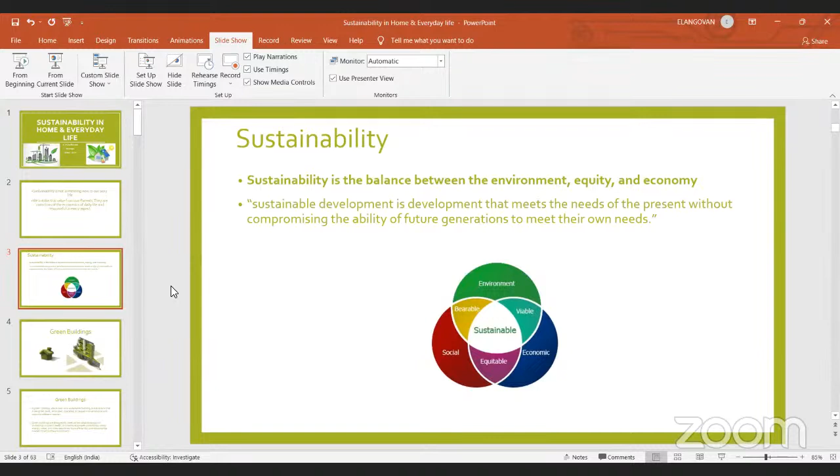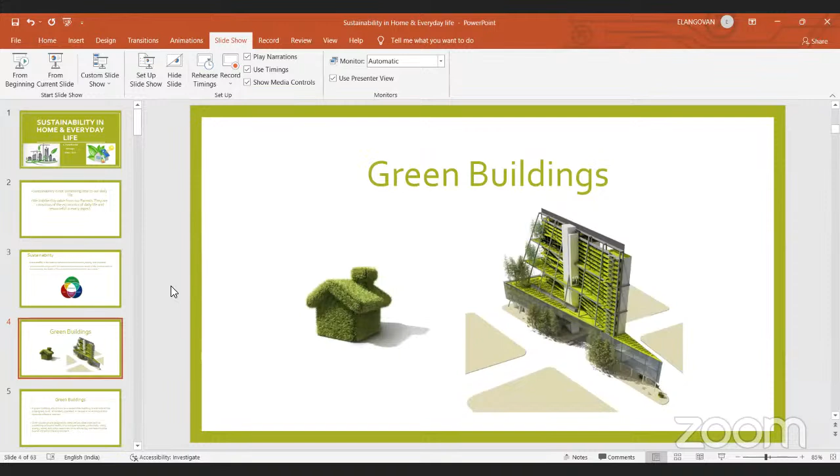Let us talk about sustainability in the sense of construction - it is nothing but green buildings. The green building is a structure that is nothing different from ordinary buildings, but in certain things, if we take care...

Madam, sorry to disturb you, there is a whistling sound. If you have two devices connected at the same place, this type of sound will come. Please check that you are connected with only one device, madam. So now it is clear, sir. Okay.

So this green building is nothing very much different from ordinary buildings, but in the way of design and building, when we design a concrete structure, we follow the IS 456 code. When we design a steel structure, we follow the IS 800 code. Similarly for green buildings, there are various guidelines given by different organizations in different countries - how we design, how we build up, how we renovate, how we keep in operation, how we recycle the buildings after its life cycle. All that put together makes a green building. You need not think green building is something we have to build only new - existing, already constructed buildings can also be made into green buildings by taking certain efforts. So the green building is a wholesome concept.

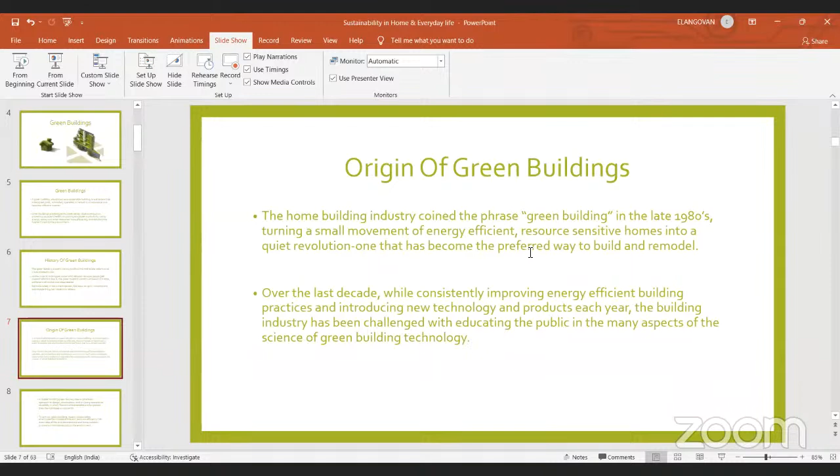All those are given so much importance. So green building is again gaining momentum throughout the world, especially in India. Throughout the world, the most carbon emitter is the US, so the same country will provide some information on how to control that also. They had come up with this green building concept, and later we also started following. India is in 7th position in the overall achievement of the green building concept.

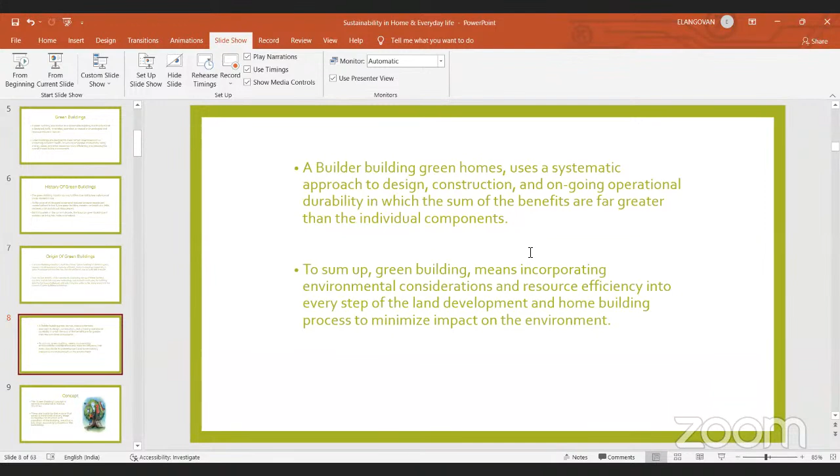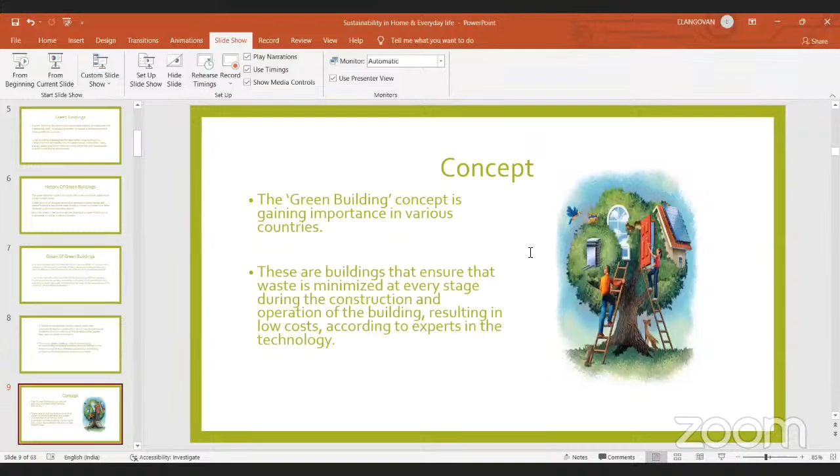The builder, basically the green building, as I said, it was incorporating environmental considerations. So the concept, how to do it, what is that green building is different from that of the regular building. The green building is like, first from the site selection onwards, every process involves considering environmental sustainability. Why do we want to go for a green building? Why not a normal building?

First is that energy, water, and the resources which are used in the building are to be efficiently used, reduced, reused - the same 3R concept we are going to tell. Another thing is protecting the occupants' health. You can construct a building, but then the building material - like asbestos, it was recently banned - the same way, because you cannot construct something which will be hazardous to the occupant who is going to live there for a long time. So you should be careful when selecting the materials for the green building.

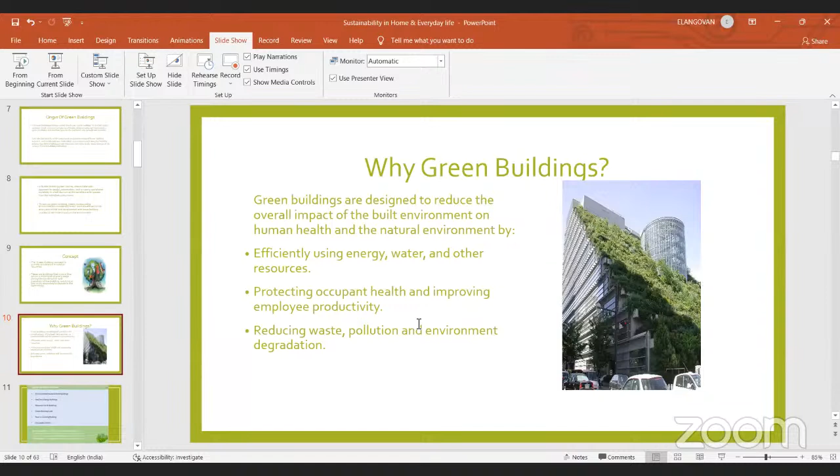And reducing the waste, pollution, and environmental impact because of the building construction and building's outcome. So water treatment and other things which are the daily part and regular part of the green building is also a concept. So what is the goal?

The ultimate goal is net zero energy building. It's like energy positive building. There is a concept of energy positive building and net zero energy building. Both mean the energy we are going to consume for construction and maintenance of the building - you should source that for yourself. If you use solar power panels for generating energy for usage in that building, it's like you are a net zero energy building. If you're going to be net positive, you can save some more on what you're using. All that will be the goals of the green building.

You'll be thinking this will cost me more when I'm putting in extra panels and all those things, but then when you think of how many years it is going to repay you, all that will be considered in the green building concept. Now green buildings have more saleability, and the government is preferring, giving more attention, loans and promoting green buildings. So you'll have those things also as an outcome - reduced energy cost, improved air quality, improved usage of materials and resources in building production, water efficiency, recycling waste and reusing them.

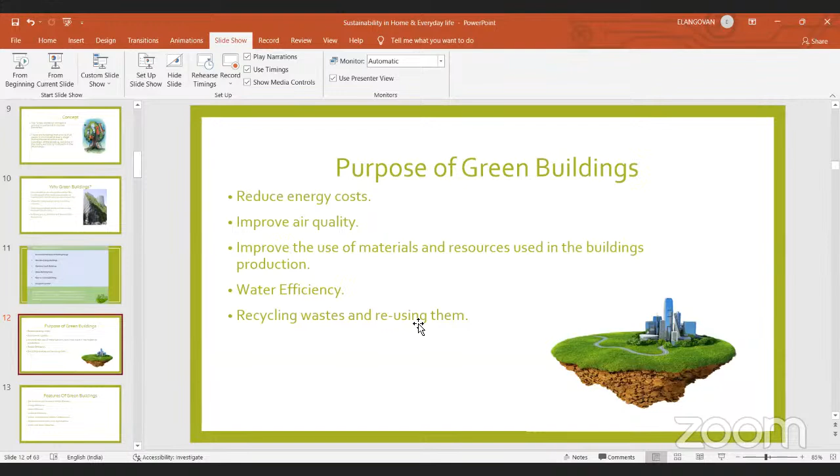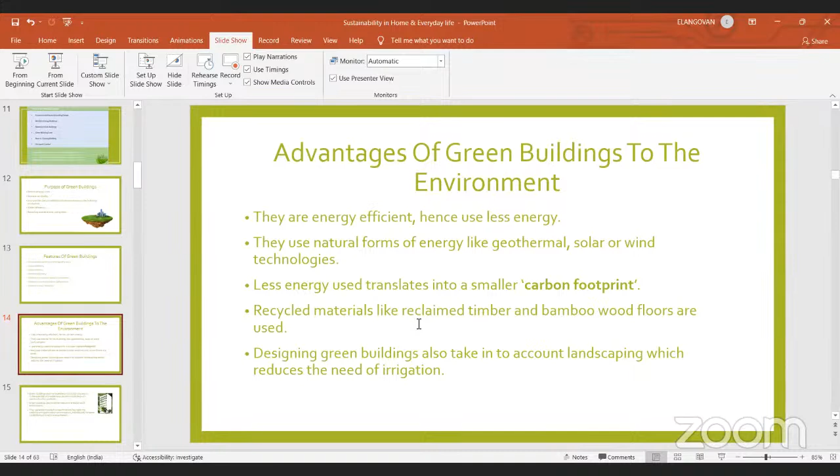The advantages are similar, the same way - the features will be turned into advantages where you have the lower carbon footprint, that is the ultimate aim. And when we are using recycled materials like reclaimed timbers and wooden floors, local materials, and natural forms of energy - that is renewable sources of energy like solar, wind and things - all those things form part of a green building.

Actually, in the green building system, as I told you, different countries have different rating systems and different organizations who rate them.

So the first and very popular concept is the LEED rating by the United States of America. Even Indian buildings are rated through the LEED system. LEED's rating system has a set of criteria, about 20-30 criteria, each with some weightage, and the total mark for the building is given out of 100. Based on that, your rating will be gold, platinum, silver, like that.

In India, based on the LEED system and other systems, we are following a system called GRIHA. I will explain a little bit on all these things. LEED stands for Leadership in Energy and Environmental Design.

Here, there is a prerequisite - as I told, there are many prerequisites. Basically, to form a green building, there will be criteria and certain things you should follow to be taken for the evaluation itself. The first prerequisite is construction activity pollution prevention, as per LEED. And water efficiency - water usage reduction during construction as well as during the operation of the building, whether it is a home or a commercial building, all those things will be taken into consideration.

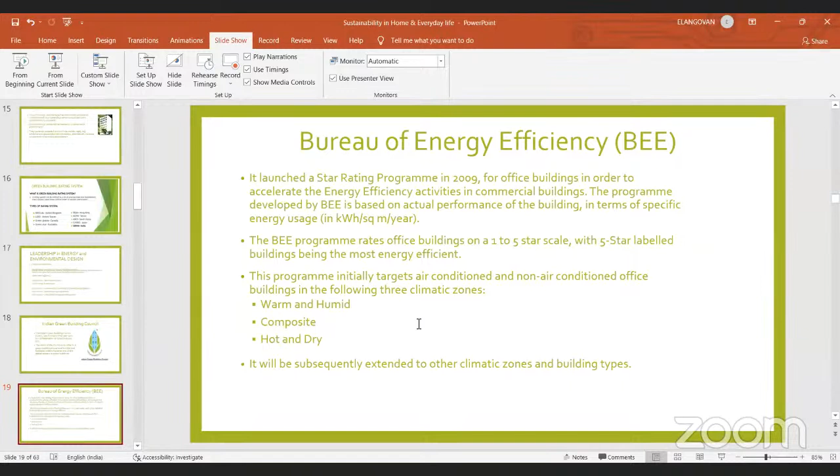The most prominent system is the GRIHA system. This was established in 2007. Here they give 34 criteria on which the building will be evaluated for sustainability. The main implementation here is renewable energy.

All the measures which we do, we knowingly or unknowingly will be doing all these things. Rainwater harvesting in Tamil Nadu - almost every house will have that. We, knowingly or unknowingly or forcibly, do that, and that is also a part of a green building system. The government provides certain schemes which people may not be aware of by name, but we will be doing that in our daily life.

Here we have the criteria again - the 34 criteria will be weighted for 100 marks. The first will be site planning - how you select the site. That will be given 1 point. Like this, you will have a number of points which will be evaluated. Out of which, if you get 50 and above, then only will your building be considered as a green building.

I can just go through some of the points in that criterion system. That is site selection - you have the site feature, and that is why site selection is important. You should not select a site where it is thickly populated and then construct there. You should have a provision for natural ventilation, and that will add points in the further criteria. So your site selection is important in that case.

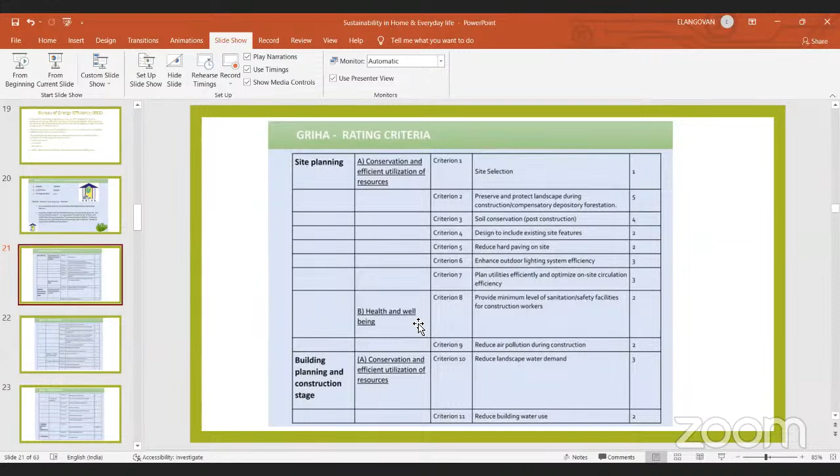Apart from site related things, there's also building planning and construction stages. For construction, we require water, so how that water is recycled and reused matters. Also, the landscape in commercial buildings needs watering, and that is an operational cost. As I told you, it's not only the construction, it's throughout the lifetime of the operation of the building. You have to take care of that efficiency - that is the green building's ultimate goal.

Next is optimizing energy performance. Then we use recycled materials like fly ash as industrial waste. Now in cities, bricks are barely used for construction - only fly ash bricks are used, because we don't get normal sand like we would in the village side, only M sand is available. So knowingly or unknowingly you are contributing to the green environment, because government restrictions automatically push you to build greener.

And renewable energy utilization - government has given many positive schemes for installing solar panels in your house, giving you energy savings through renewable resources. Even for commercial buildings and small scale industries, when they install solar power, they are given more preference and positive incentives compared to normal consumers.

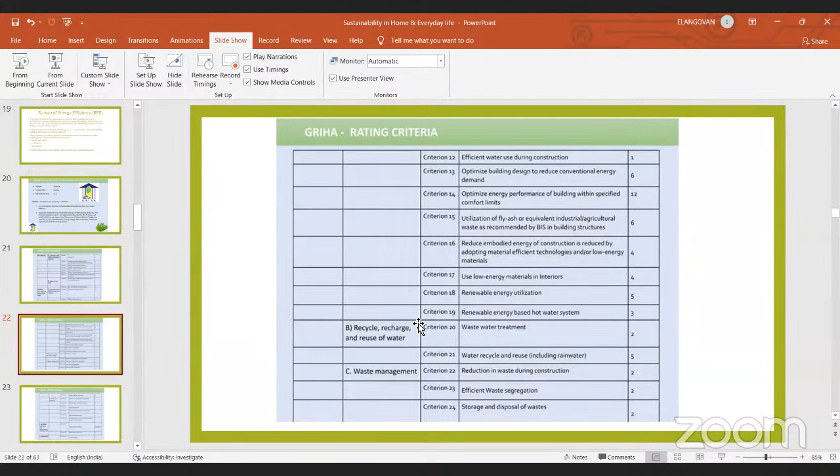Next is paint - generally we used high VOC paints before, but now they are reducing that content to be eco-friendly. We are maintaining paints that don't emit CO2 or greenhouse gases - those are now banned, and we ensure we use eco-friendly materials for construction as well as architectural features.

And in green buildings, there are no smoking zones allowed, because occupant health is a priority here, along with air quality maintenance inside the apartment. What we are planning is to take maximum advantage of natural air and natural light only - if we pollute that, it's like polluting the environment. These are certain things they have made very stringent.

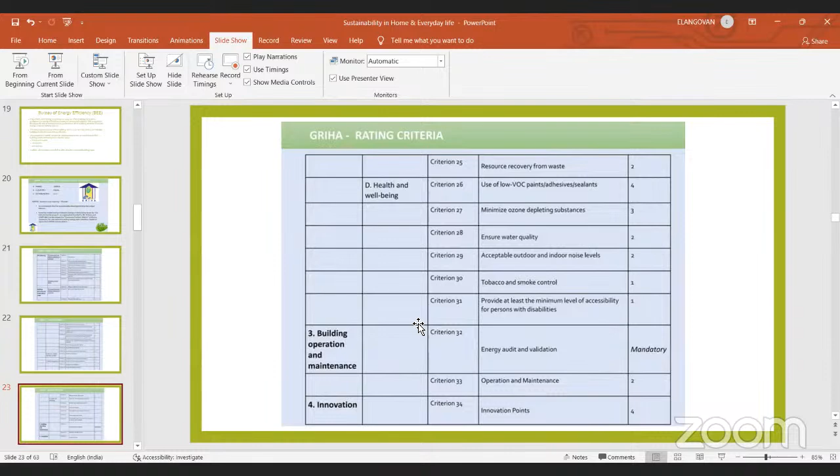And apart from that, any innovation the construction plan manager or planner comes up with is also given weightage. So out of this, the 100 points come from 34 criteria. This is just a brief overview to give an image of how things are done in every part of a whole house.

When you come to the roof, there's a rainwater harvesting system - that water can be used for drinking if it's very clean, or recycled for toilets and bathrooms. We have solar panels, and if possible, small wind turbines can be installed at the top. Solar panels are made mandatory in most apartments and commercial buildings in urban areas.

And then you have composting. Again, in cities, in all metro cities, waste segregation and composting is made mandatory now.

It is a waste segregation based on recycle and non-recyclable things. The recyclable materials or green waste are made to compost in their own apartments or commercial buildings, and that is used for landscaping. Whatever sewage treatment is done is also done in a similar way.

Power-wise, there are hereafter no more old tube lights; it is all CFL bulbs, so that will save us at least 20% of the energy we used earlier. Similarly, whatever water is recyclable, that is gray water, can be used for our non-potable uses.

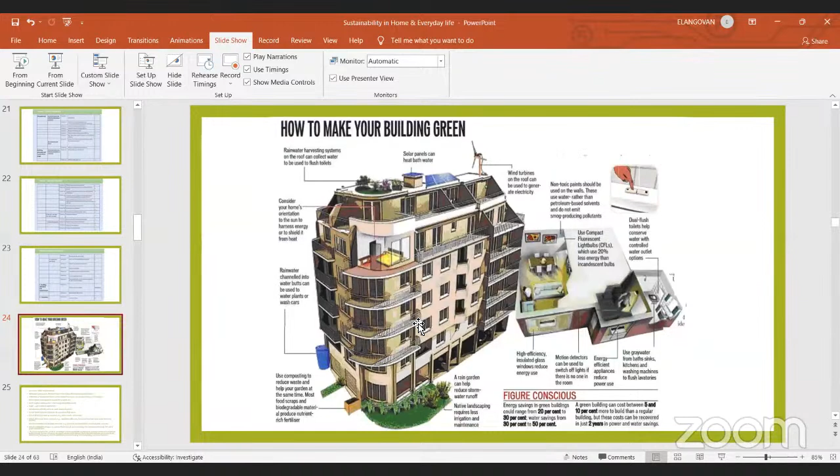Some other points taken into consideration for green buildings are access to public transportation. Why public transportation? Because as I told, green building is a holistic approach. When you use a car daily to travel to your workplace, you are releasing greenhouse gases (GHG) to the environment.

To avoid that, we should use public transport. When it is accessible, when your apartment is closer to a metro zone, or nearer to a bus stop or railway station, then you prefer public transport rather than a vehicle, because you have the advantage of economy and comfort. This is also a part of green building, which is why site location plays a major role.

Maximizing open spaces is important because we have to make an advantage for air circulation inside the building - natural air, not artificially air conditioned air. So we tend to make bigger windows and orient them in a direction where we have regular airflow in that region.

Native vegetation - landscaping should be done with natural, local vegetation that is available. We should not import something from abroad for the sake of landscaping. If it is native, the soil will be used to it, and water consumption will be suited for that purpose, so it benefits both.

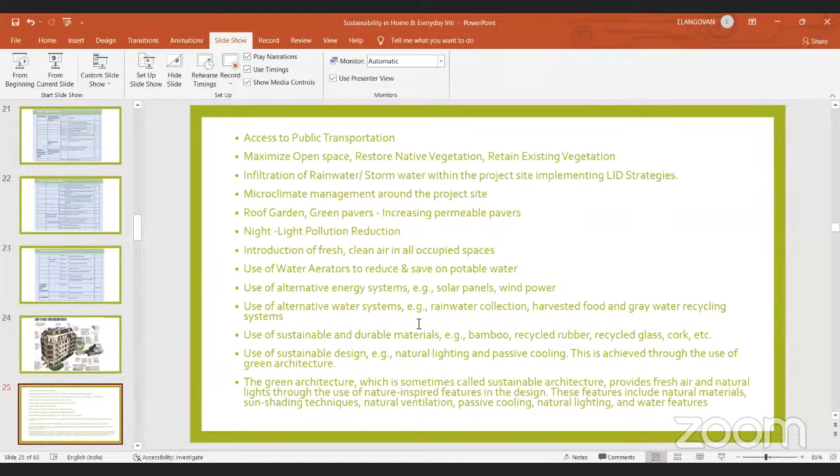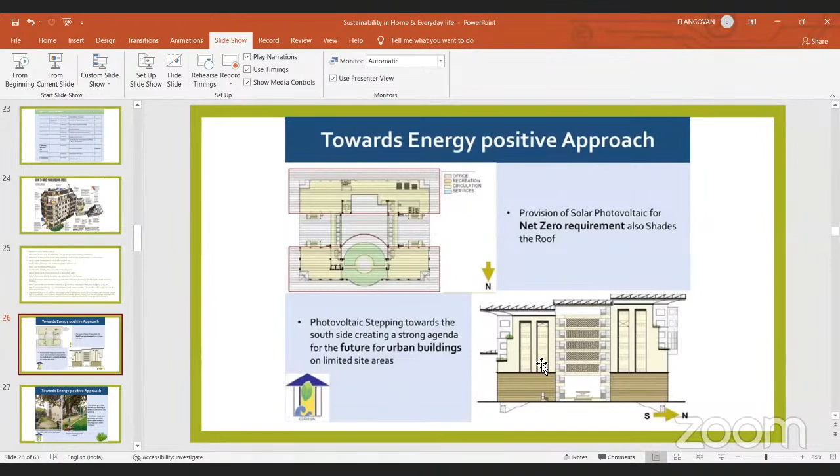These are just a few photographic explanations of what I told here. On the roof, you can install solar panels so there is net zero requirement of energy. For photovoltaic stepping, as seen in recent commercial buildings, instead of putting full concrete cement flooring for pavements, we can use pavements that allow water to recharge the ground.

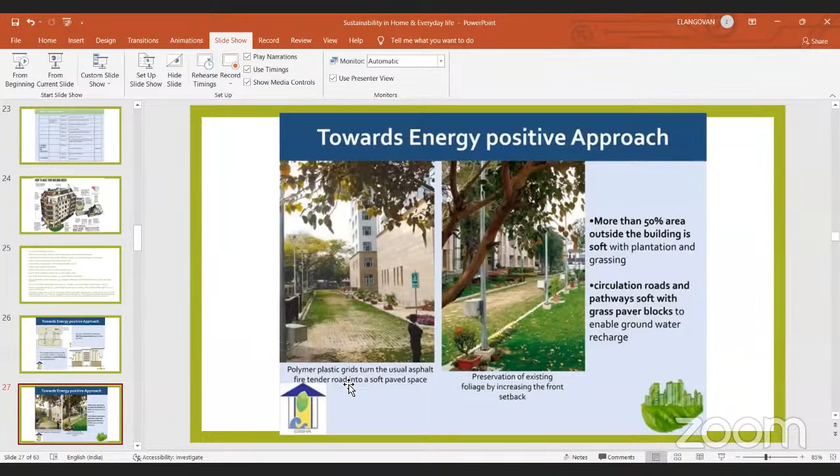We can use the terrace garden. Terrace gardens are promoted, as well as vertical gardens. In apartments or houses where you don't have space - say only 1,000 square feet that you have to build fully - you can at least provide vertical gardens. These things are being promoted now as energy-positive approaches.

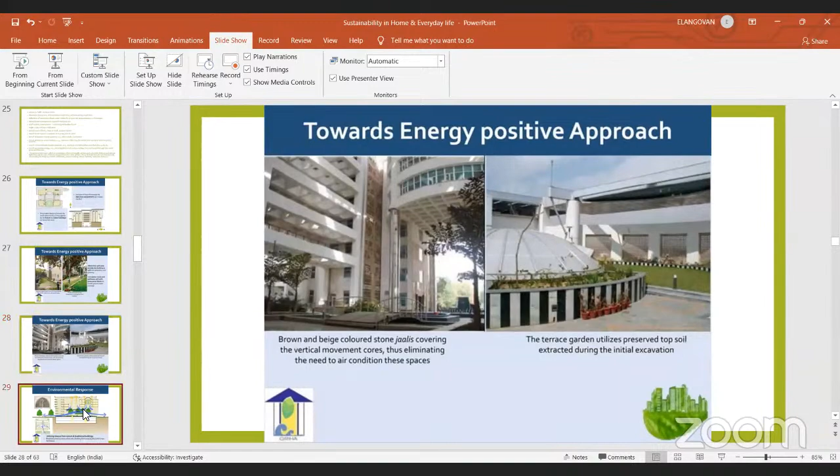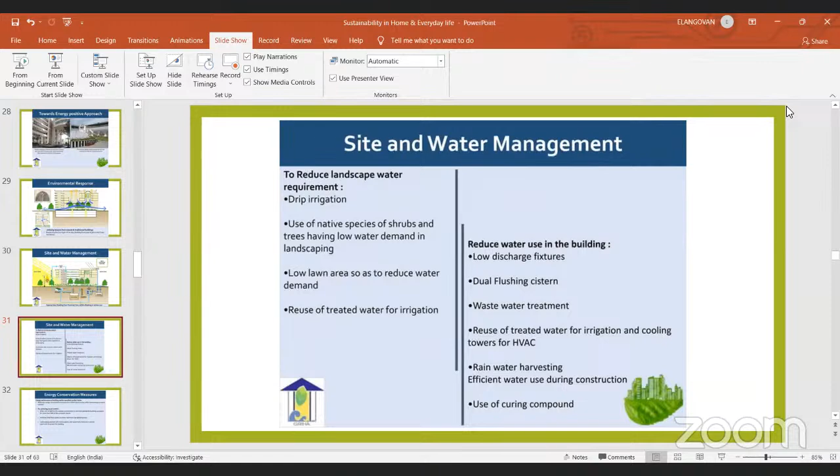So how to reduce water management during construction and operation of the building: we can use drip irrigation, which even farmers use these days, native species of shrubs and trees, low lawn area to reduce water demand, and reuse of treated water for irrigation, low discharge fixtures, dual flushing cisterns in the WC, mandatory wastewater treatment, rainwater harvesting for effective water usage during construction, and use of curing compounds.

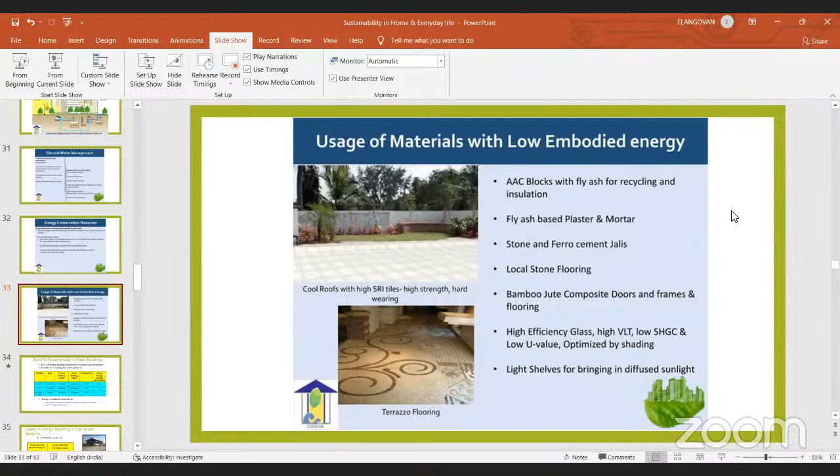Regarding materials, we can use plaster or fly ash based plaster or mortars for construction of walls and floors, stone or ferro cement jalis and local stone flooring, whichever is local to that area, and bamboo composites, which are available in that area, for construction.

Now I'll list some of the benefits we experience because of green buildings. This is a proven record from three buildings - Wipro, ITC, and Godrej - which are commercial buildings. If they had constructed a normal building instead of a green building, their energy consumption would have been high. It got reduced almost 40% to 50%, and their savings per year is this much. So over 5 to 10 years, whatever they spent extra for green efficiency, they will get it back.

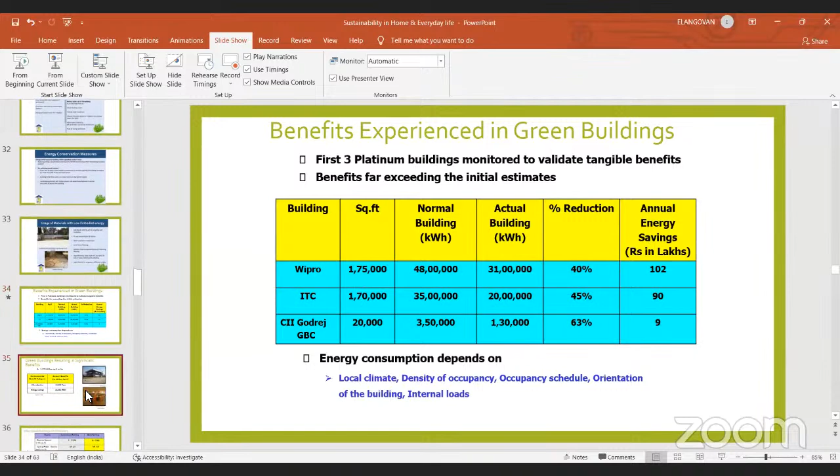Similarly, in terms of carbon CO2 reduction also, it will be significant. So green buildings are much more environmental friendly. It's not environmental friendly alone, it is more sustainable in our scenario.

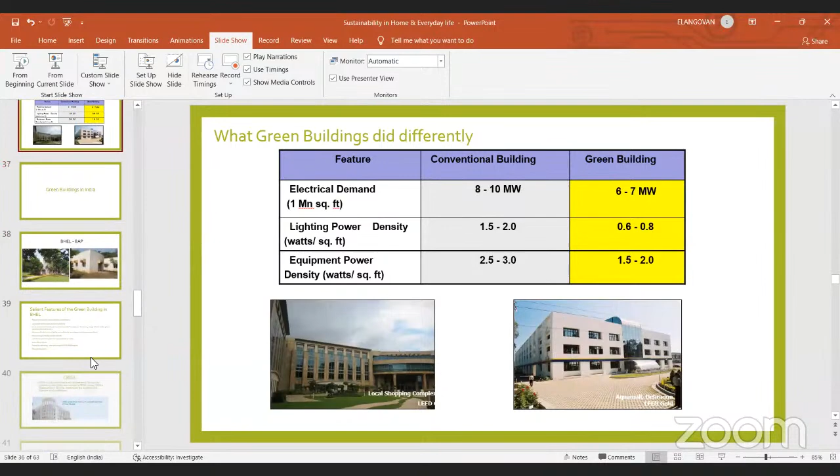Some of the green buildings in India - we have one in our BHEL Ranipet. It is an electronic shop which was designed exclusively by our own BHEL colleagues. I can list down a few of the salient features of this building.

The plan and orientation was for maximum lighting - it was designed such that the plan and site orientation gives maximum lighting and ventilation by itself, so you avoid artificial lighting most of the time.

Here you can see curved brick walls for stability. All industrial buildings are normally reinforced concrete design, but since this was built with curved brick walls, we avoided the reinforced structure, and it was done for maximum stability.

Environmental friendly and recyclable materials like UPVC windows, door frames, energy efficient window glasses, aerocon roof tiles are all used for construction of these buildings, and local materials are used. The local vegetation plants were also used - the landscape is made up of only local plants.

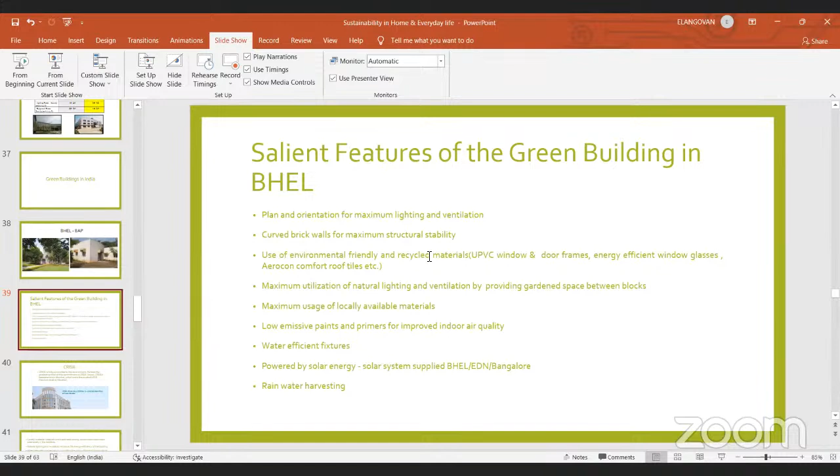Low emissive paints and primers for improved indoor air quality were fixed, and water efficient fixtures were there, and it is powered by solar energy supplied by our sister unit. We also have rainwater harvesting for this building. So these are some of the salient features of this building.

I wanted to stress one more building - India's CRISIL building. Here also it is LEED Platinum - Platinum is the highest level given for this certification. This building was awarded in Powai, Mumbai, the LEED Platinum certification.

Here I want to list the main features used in this building: constructed based on local materials, sustainable energy sources, natural lighting and ventilation ensured, adequate green spaces controlling the microclimate - the local climate - and since Mumbai is a coastal area, they planned all the landscaping based on that.

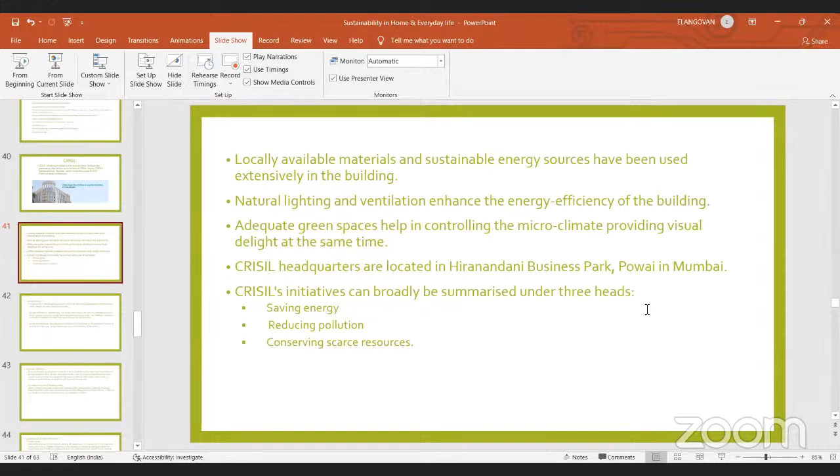For saving energy, there is frugal use of artificial lighting - 75% of daytime working. We generally, even in our offices, switch on the lights first when we enter. That is avoided totally in this CRISIL building, 75% of the time - only during the rainy season, which is hardly 2-3 months, do they use daytime artificial light. Other than that, they don't use it at all.

Energy efficient air conditioning systems had been used so that it saves on electricity usage. The building was also designed such that thermal leakage, both inside and outside, is prevented, avoiding excess AC consumption.

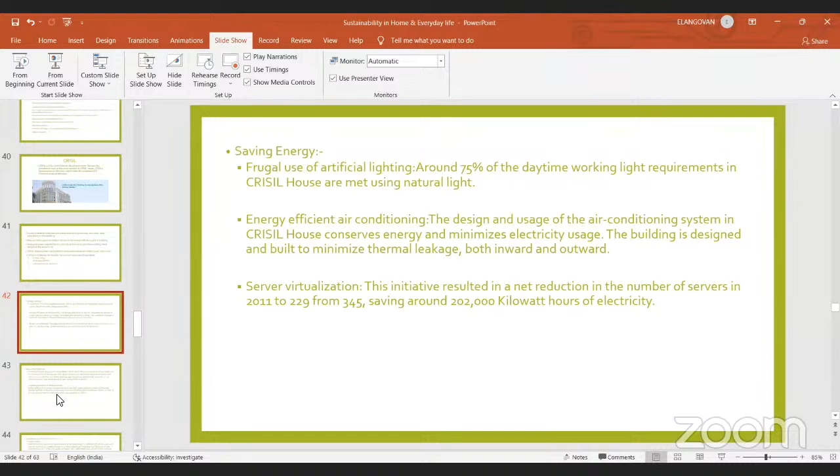Server virtualization was also reduced, saving a lot of electricity. Waste sorting - food waste, paper waste, and others - is sorted and recycled there. And to avoid transport of drinking water, they have a reverse osmosis system instead of bottled water.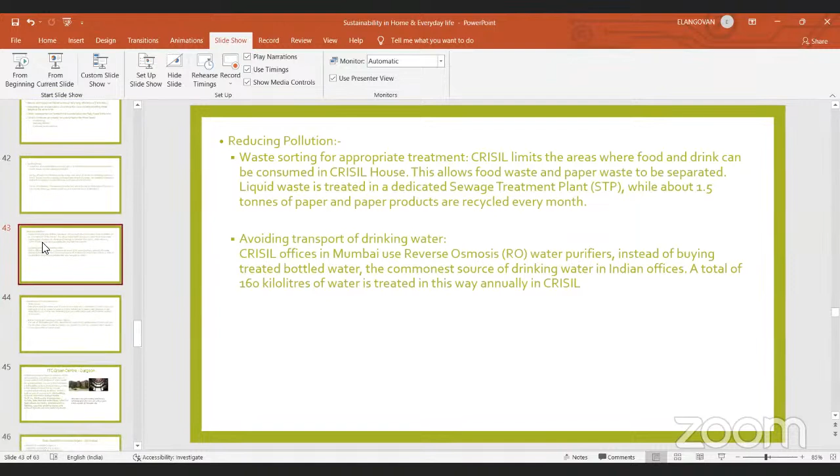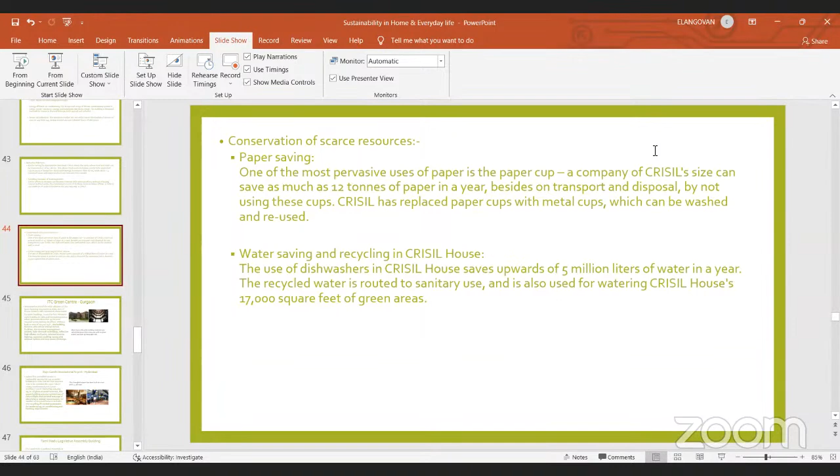So nobody is allowed to use bottled water in their premises. And very scarce resources like printing papers, all this is also taken very seriously. Paper cups are not given even for a meeting, so all are given only metal cups. Water saving and recycling are very seriously taken as important issues in CRISIL.

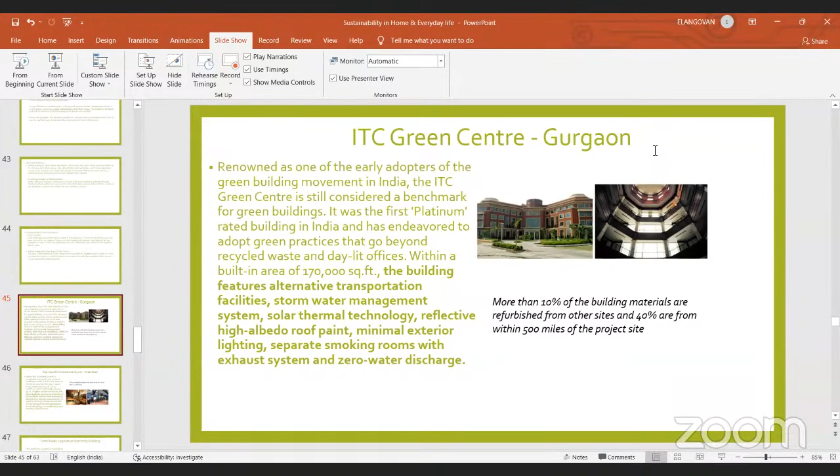Other than that, we have a few more buildings, like ITC Green Center Gurgaon, which is also ITC. And the Rain Tree Hotels throughout Tamil Nadu have all become eco-friendly or green oriented buildings. They have made it very sure that they function as eco hotels.

And this is one more classic thing: the Rajiv Gandhi International Airport in Hyderabad, which is awarded the LEED silver rating, is a very prestigious project. They have constructed it fully of glass so it will be see-through, saving so much material as artificial lighting is avoided in many places. There is also recycling of water for landscaping, air conditioning, and flushing requirements.

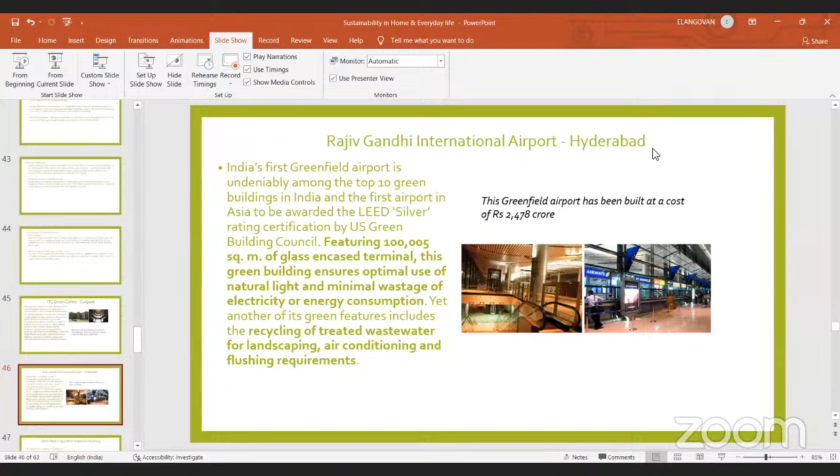Our Tamil Nadu Legislative Assembly building, which is a very common thing we can see, is also a LEED gold rated building. Let's know a few of its features. It saves energy of about 15 to 20 percent, and water saving of around 40 to 45 percent, and it has a rainwater harvesting system.

It has a roof garden to reduce the heat island effect, and reuses 100% of water for landscaping and flushing requirements. The construction waste was 90% recycled. And electric charging fueling stations are now introduced in the parking lots.

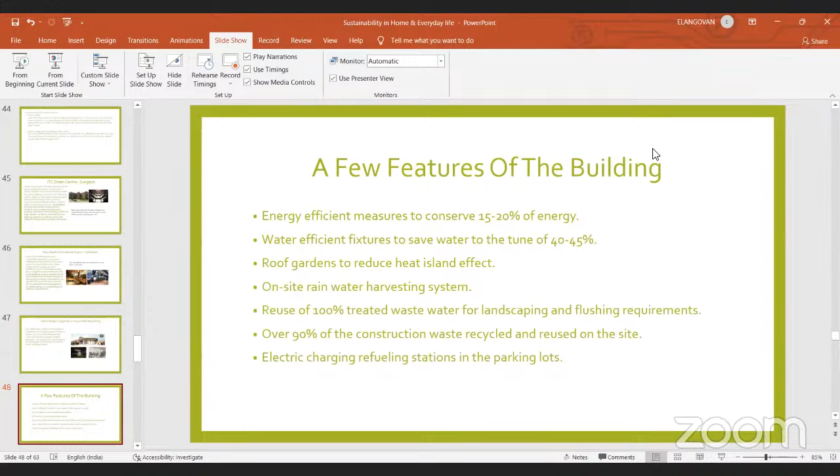So we should start thinking green, and if possible, whenever we are constructing houses or when our friends are doing so, we should suggest something which they can turn into green. And this is all about the construction or the home aspect.

Other than that, I want to touch upon a few points on sustainability in everyday life. As I said, we are already in the process, so I just want to highlight or emphasize the points of what we are already doing. These are a few of the things we do in our house.

The first thing is, as I told, we always recycle the newspapers, the milk covers, and other things. These are some more things.

We never waste a drop of a food item. It is not that you are being cheap. No, cheap is different and frugality is different. Sustainability is about being frugal, in the sense that we should not waste something which will be otherwise useful.

We can recycle old saris to make gift purposes, like gift handbags, or gift wrappers which are used in birthday parties and other things, which otherwise directly go to the dustbin. Instead, you can make cash covers which are used for weddings or other ceremonies. Recycling in any form adds to sustainability.

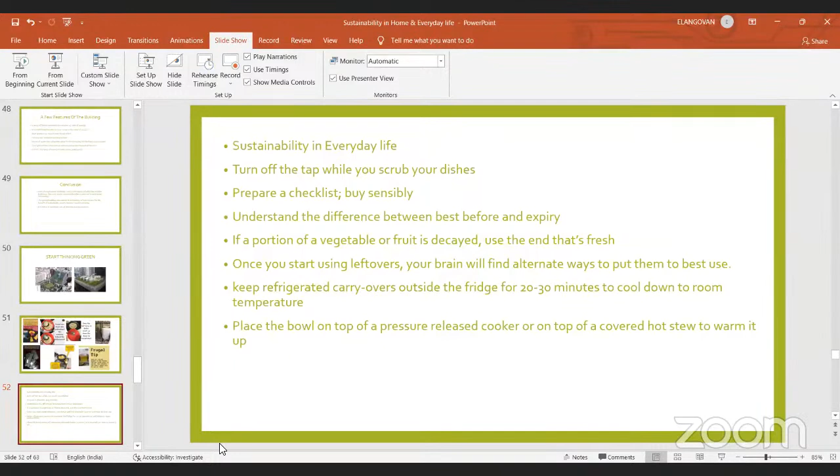If you want to put milk for boiling, you can remove the packet and keep it for 20 to 30 minutes earlier, so it will naturally cool down. You need not waste energy on boiling that extra chill, which will happen naturally. As I told, for cooking or reusing whatever is hot, we can reuse that energy and save energy.

While coming to the shopping point of view, we can avoid impulse buying or spur of the moment purchases, and never go shopping before eating. After eating, if you go, you'll shop less. When you're hungry going for shopping, you will always spend more. That is a general psychology, and I have read that.

I thought it would be very funny too, but then I experienced it myself quite a few times. You can also experience that when you note it hereafter. So always avoid it—go for purchase after a good full meal, so that you will spend less.

When you're online purchasing and there's an offer, we tend to buy more, and then we tend to waste more. So whichever items are not perishable, that don't decay, those items you can buy in stock. Like you can stock soaps, washing powders, or detergents and other things with a lifespan of 2-3 years, so you can buy in bulk, 5 kg or 10 kg, on offer—that is fine. But when you're going to buy an eatable or perishable item, then it's not worth it, even if you get it at half price.

So next, Amazon sales—you should take advantage of all the Amazon sales or anything whichever is there, and take advantage of offers or credit card cash offers, everything. Now almost everybody is aware of all these things, so we have this habit.